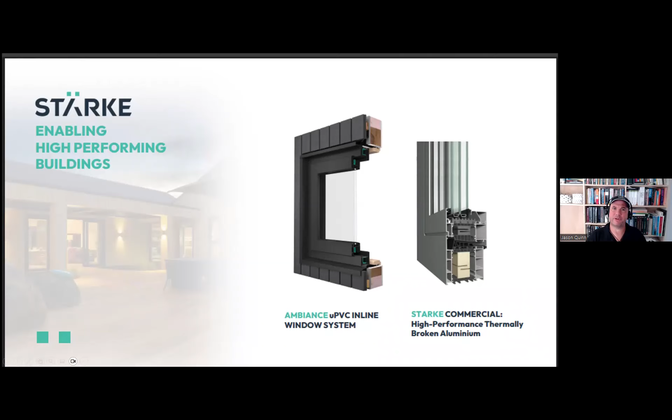It's good to show folks cross sections of the UPVC, and are you okay with the brand name? You can nod or not nod with the aluminium series. Yeah, sure, those high performance Reynaers aluminium profiles.

Folks might not know, but I've got a couple cross sections of windows in my basement I've had since 2010 or so, and I've brought them out at various times. One is basically equivalent to the UPVC profile that you offer, as well as a high performance Reynaers assembly. I've had that for a very long time. It was gifted to me by a window supplier in the US.

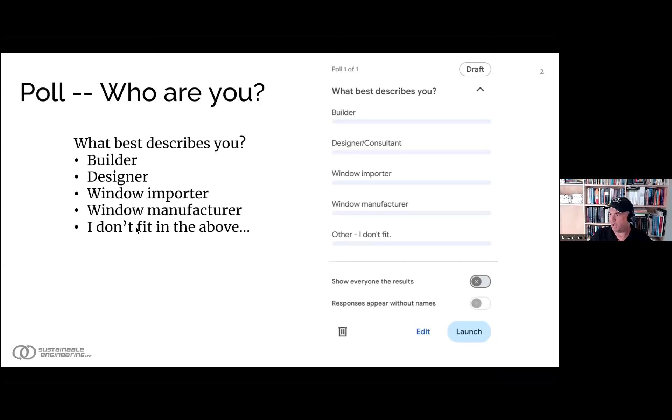This presentation is effectively a simplified excerpt from our Passive House in Practice course, which is intended to follow on from the Certified Passive House Designer training. It's basically a mentored approach where we take folks through their first passive house project all the way through certification submission.

So we've got it, and it's what we do with our own staff when we've got a new person join the team who wants to become a Passive House designer. We have a process they run through. The building science taught in the Certified Passive House Designer course is amazing, and there's not much I can think to change on that. But the processes and tools you use in actually getting your first project can be quite stressful and dramatic. I know my first project in 2012 was pretty stressful for me. So that's intended to address that, and this presentation is effectively a cut-down version of the Windows session of that course.

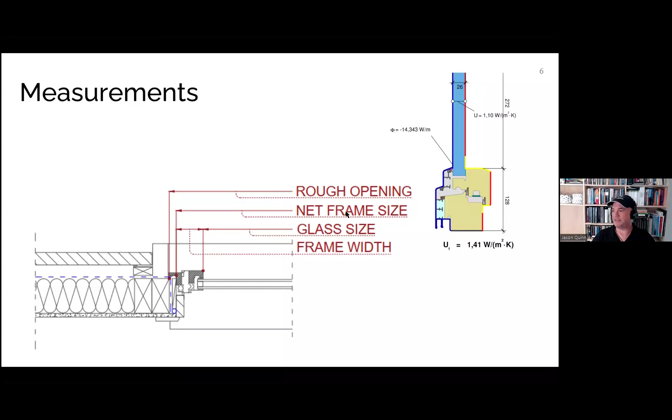There are other sizes, of course, and we'll talk about how those affect performance and get into all those details. But literally the first pitfall you run into as a Passive House designer is figuring out what size the windows actually are, which is pretty entertaining, but we just need to be clear. It doesn't help that the Germans keep using rough opening in the Passive House Planning Package manual, which confuses everyone, but it's net frame size. It's very clear. Okay, first pitfall accomplished.

The next one is - I don't know how much folks have played around with Passive House Planning Package 10. Some of the Passive House designers have been around since version 9, or I started with version 7 even. Passive House Planning Package has this new multi-pane update in Passive House Planning Package 10.

Effectively it allows you to enter windows with this window here showing in height and width on top as one window. That makes the thermal comfort calculation more accurate because it knows the whole size of the window. That allowed them to take away some of the exemptions for really small windows, but it also makes it much more accurate for thermal comfort calculations.

However, if you're using designPH, which is a process we teach internally and I recommend folks use externally, it can't handle multi-pane windows. So you have to make the choice: either, and this is the pitfall, model the whole big window as one big window and get the shading factor, then manually add in the other panes - basically adding in these mullions and transoms. Transoms are horizontal like a letter T. Transoms and mullions, right? This makes the results more accurate - it just works better if you can do that.

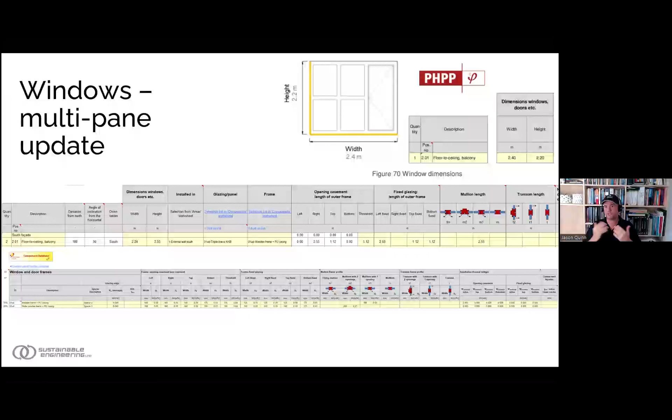Or, which we often do in our designs, is use Passive House Planning Package 9 style, where each bit of glass is modeled as a separate window. So this would be 5 windows, not 1, right? If you're using PHPP 10 style, you need PHPP 10 style data, meaning data on the mullions and transoms, so you need to simulate it conservatively in your design. Not all window suppliers have that. Starke windows do, of course, and they're available in the database, so you can just drop them in, and I'll show you that in a few minutes.

Another pitfall that gets people, and is actually reasonably important for overheating analysis, is window frames suck, right? They tend to have the worst U value - the lowest R value in the whole building is the window frames. Occasionally you'll have double pane glass in a really good performing frame, and that won't be the case, but almost always the frames are the worst part of the building.

So one of the improvements in Passive House Planning Package 10 is basically accounting for window frame color. If it's white, I put in 0.25 personally, but it's somewhere between 0.25 and 0.4. If it's black, like the series you can get from our sponsor today, then it's in the 0.8 to 0.9 range. What you'll find is that if you have a poor performing frame, especially like a solid aluminum frame, and you put in a black frame on an existing building, you'll get much more overheating because the energy is coming right in. And like everything in PHPP, this is not the reality - if you're sitting right next to that window, the impact can be much different, because this is averaged over the whole building.

So those are the big impacts that happen in PHPP before you even get to the window supply and window data. All right, Aaron, did you want to say something?

I've got the poll results if you want to know. Yeah, if I could hear them. So on the webinar today, we have builders at 5%, designers at 76%, window importers at 5%, window manufacturers at 2%, and people that don't fit into those categories make up 12%. I really wonder who the other is - is that just some people who didn't click the thing, or do you think people actually clicked other? I'll have to think about that next time. Anyways, but that's sort of what I expected.

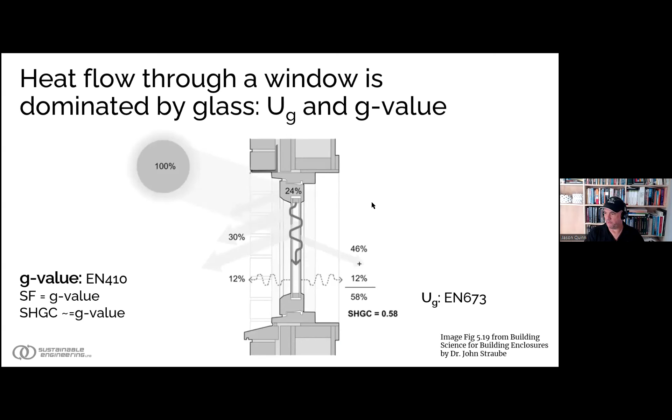All right, so the number one pitfall for passive house designers is data for the passive house planning package. You would think if you're dealing with a person that's supplying windows to you, that they would have frame data, especially if they're making millions of windows a year. That is not necessarily true.

We've got two projects in the books right now, and both are hanging out for frame data. In other words, they've bought the windows, put them in the building, passed their blower door test, and they'd like to certify their building. And we're like, hey, we told you at pre-construction you need this frame data, and it's really important, and you didn't give it to us, so we'd like to see it now.

And they're like, the window supplier told us to go pound sand. Yeah, as you can see, it was a pretty emotional one.

It's not fun being the certifier and having to say, hey, you really need to get that data, or use this conservative number. And the conservative number, of course, causes problems with their energy model, so they don't want to use that. So that is the number one pitfall.

It's a problem that stems from the designer, in my opinion, because you're the adult in the program, not the window supplier. They're kind of salespeople, to some extent, and they get to drink and party and have fun, while we do math and drawings and design buildings for our clients. So it's our responsibility to make sure the data is there before you give them money, in my opinion.

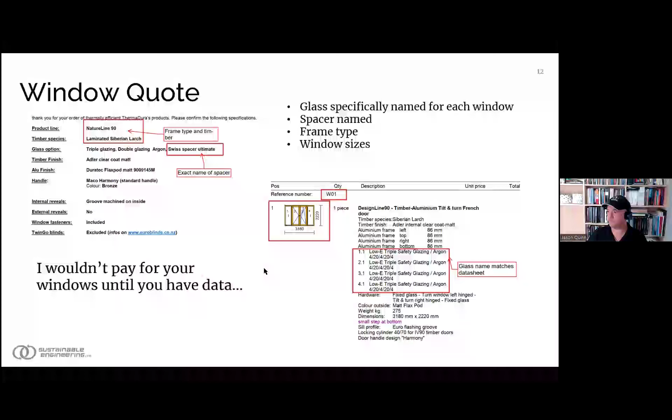There's only two variables in the passive house planning package: this UG value and this G value, or solar factor. The problem with that is it's nice because it gives you two numbers you can calculate easily and they're easy to supply, but it doesn't give you all the information you'd typically want if you want to look at thermal comfort. In the summertime, if sunlight's directly hitting the glass, the interior pane's temperature depends on where the coating is, and how hot that glass gets. I'll explain that in a sec, so we'll talk about that summer temperature.

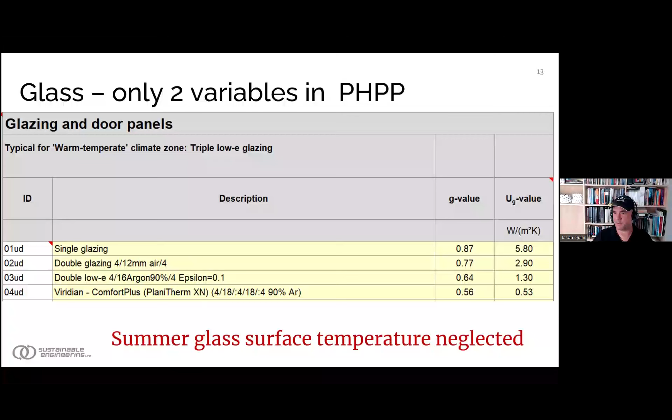So here's one European style data sheet, and it has two numbers on it that matter: the G value, which is per EN 410, and UG, which is per EN 673. In New Zealand, we're lucky because H1 literally says, tell me the UG value to EN 673.

It doesn't say where you get the G value or solar factor from, but it's close enough so it doesn't really matter in the end. And it's important that if you get these sheets, the standard in Europe says to only show the UG value to 1 decimal place, and that makes sense for double glazing.

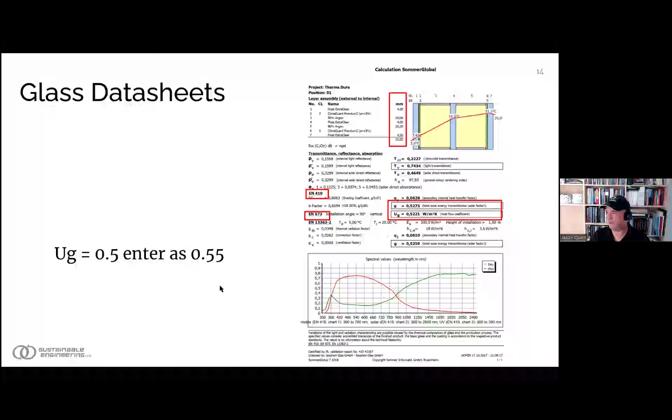That's 10% more heat loss over a fairly large area because it's all the glass area, right? So it's important, if you're using triple glazing, to have the glass at 2 decimal places, and make sure you're conservative, because that can catch people out.

Here's what I started talking about: solar heat on the window itself. PHPP just has a number for the G value, which is how much sunlight that hits the glass gets kept inside the building, but it doesn't tell you how it feels sitting next to the window.

The reason being is that's where most of the work is done bouncing the sunlight back out. So that coating gets hot, which makes the pane of glass on the outside get hot. The nice thing about having it on the outside pane is then it ventilates away, because that outside pane is next to outside air.

But if you have it on the inside face instead, you get about 30% more heat gain in double glazing, less in triple. And the inside pane - that's showing up in the G value, but what's not showing up is that the inside pane is considerably warmer now and can get quite hot. When you're sitting next to it, the heat that comes off is just uncomfortable to sit next to.

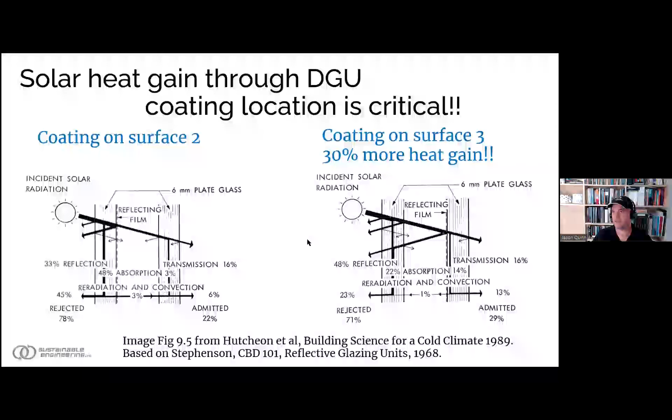So just realize that thermal comfort is one of the things we want to talk about, and where the coating is matters. Although the G value tells you how much energy is kept in the house overall, it doesn't tell you about the losses. So that's all I want to do, right?

It's often useful to plot the data when you're trying to pick glass. Luckily, most suppliers will only give you a couple of glasses initially, and you'll have to dig to get more. But realize that you can get glass that ranges over quite a range of solar heat gain coefficient, or solar factor, on this chart, which is G value. So you can get glass with the same U value but quite a bit different solar factor.

The extremes here, Xcel and Xtreme, are the two most common glasses that we use in New Zealand.

Sorry about the hand signs to the mailman outside. He really wants to deliver a package, and I'm not leaving.

So these glasses have a fairly similar U value, but they've got very different solar heat gain coefficients, and they've also got fairly similar color neutrality, let's call it that. You can see they let slightly different amounts of energy through in terms of natural light, but the natural light you can see is nearly the same, right? So there's not much tint.

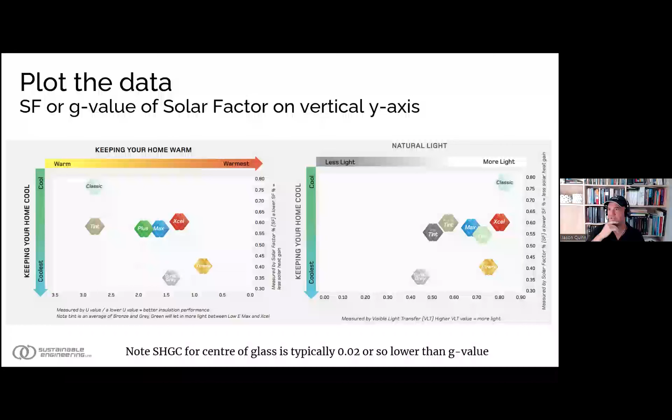So realize that you can get much lower solar heat gain coefficients, or solar factors, or G values, and still have the same U value or slightly better U value and similar sunlight gains - in other words, similar daylighting in your home. That's done through what they call a double silver or triple silver low E coating on those windows. It's a more expensive manufacturing process, but more importantly, from a pricing point of view, it's an up-spec, so they charge more for it. So just realize it's not free.

One reason I talk about solar G value is that what you've experienced living in New Zealand is not necessarily true about high performance windows. You may be used to the idea that closing a white curtain or blind on the inside significantly reduces overheating in that room. I've got white blinds closed in this room with single glazing, which bounces most of the heat out and keeps the room comfortable. So if you have white interior roller blinds with single pane clear glass, you can get a 70% reduction in heat gain by closing them.

That same room with triple low-E glass, like you'd put in a passive house in Wellington and south, you only get a 40% reduction. In other words, they're half as effective as interior white blinds. So what you're used to thinking you can do with interior blinds in that space isn't true, which is why in Passive House we push exterior blinds so much.

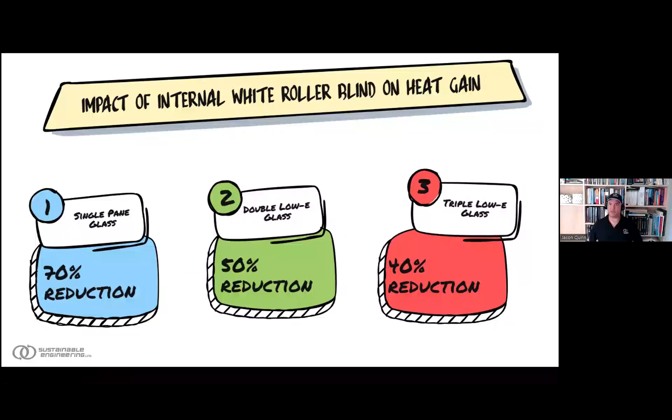I don't want to spend too much time on glass selection, but this is for double glazing. You can see the cost for glass basically doubles or even triples for some of the more expensive coatings. This is glass assembled, provided by Metro. For glass only, it can be as much as three times the price for really high performance glass. But in a frame - I don't know what frame this is - going from double clear air-filled, relatively poor performance glass to really high performance double glazing, the cost increases only about 30%. So it's not zero, but realize it's not three times the cost.

Notice also that Xcel here, which gives almost the same U value as Xtreme, is only about 10% more in this graph, whereas Xtreme is like 30% more. That's due to what's charged for the glass - you can see it in the glass prices as well. So we generally try to design our buildings around something with similar properties to Xcel, and there are a couple of vendors available locally we can work with, even in triple glazing. We only tend to use the lower solar heat gain coefficient, or G value, of the Xtreme when we need to - generally because the building's overglazed, but I won't get into that since that's not my pitfall to catch.

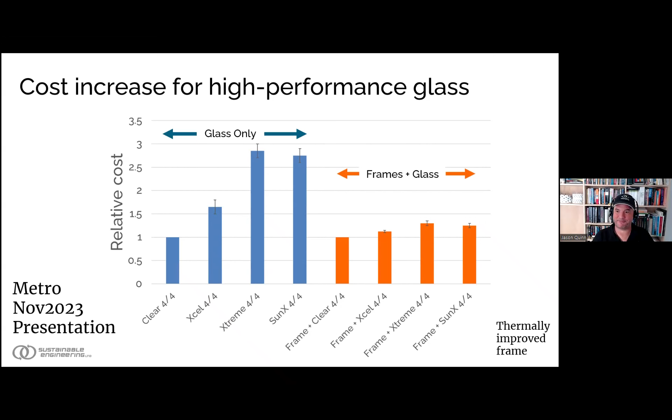Okay, next pitfall: understanding what you have or don't have. And we're just about on schedule, so that's great.

One of the pitfalls is: if you've got windows in the database in your PHPP, you need to understand what you actually have to install on your building - in other words, what's going to show up on site. It's amazing how many times I've been on a project and we look at the windows and realize we don't actually know what profile this window frame is in this location. That can be impactful - for example, if I was importing lift-slide windows but had all the data for a tilt-turn window, which is quite common, I might not know the data for that lift-slide window. I know the frame heights from the CAD drawing, but not the actual frame performance. We can estimate it and agree with the certifier, which we've done on our design projects, but if there's another frame profile we hadn't thought about and hadn't agreed with the certifier, it can cause significant grief.

The databases typically only have tilt-turn windows in them. So if you see a Passive House project claiming 'we've got a Passive House certified window,' often that only means the tilt-turn window has been calculated and certified - it's very unusual for them to have the whole suite of data. I'll show you what that looks like in a little bit. Okay, so - window performance.

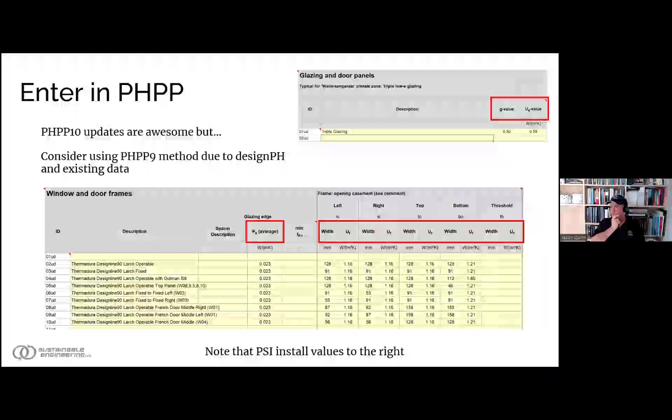So, okay, make sure that psi-g gets entered. The glass data goes into a sheet that looks like the top right, where you've got a G value and a UG for the glass. And then for the glass spacer, it goes on the component sheet, and then under the windows and door frames, there's a glazing edge section. We can put the spacer brand and model, which I don't know why I didn't put it in here. And then there's the psi-g value.

And you can see here, I think that's a Swiss Spacer Ultimate, which I should have brought a sample out, but I won't go grab it out of the closet at this point, which has a value of 0.023, which is quite high performance for that spacer. And that's a function of the spacer as well as the frame, as well as the fact it's triple glazing.

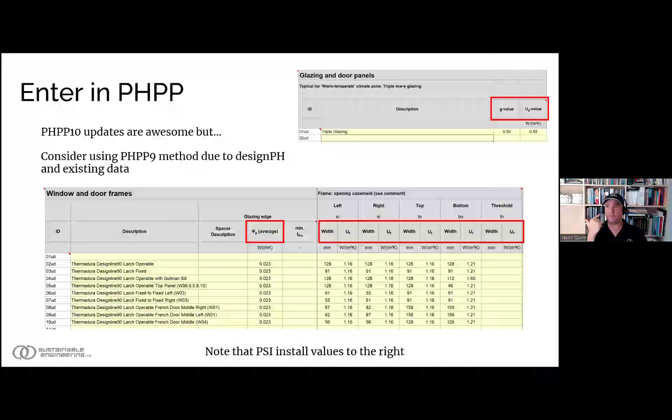All right, okay, so next one. So next we'll talk about frames, finally. It's really important you understand what you have or don't have in the building. If you don't know what kind of frames you've got in the building, then you can't energy model it because you don't know what it is.

So some windows have a full suite of data, like this is a PassivHaus planning certification for a window, and it's actually got the UF, the frame values for all these different kinds of frames, the mullions, the door thresholds, all that kind of stuff. That's really, really unusual. There's probably 5 frames in the whole database that have this much data.

Almost all of them, well, quite a few of them are just for the tilt turn window. And the numbers off this sheet that are most important to look at are the frame height and the UF value. So basically, if you think about the energy loss around the frame, it's a function of the height of the frame and the UF value.

So the UF is almost always worse than the glass. For a good PassivHaus window, this number is somewhere around 1, which is quite a good frame, right? But quite good triple glazing will be below 0.6, might be even 0.5 something. So it's losing 40% more energy per unit of frame height or width. So it's important to understand both the frame height and width and the U value.

And yeah, there's lots of ways to make assumptions and stuff like that, and I won't get to that today because that's quite time consuming. On this database, you can find windows, skylights, and glazing edge bonds, what we call spacers.

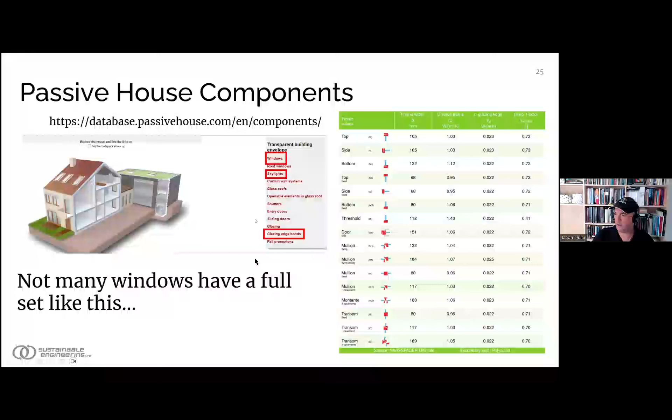This is such an annoying piece of crap to deal with that we put together a window database. So on our website, you can go to library, window data PHPP, and it brings up an article which has a URL you can link to get this spreadsheet, which is just a Google sheet with all the data in it. And this is the windows from whenever I made this slide.

So you can see the Starke windows here. They've got both fixed, awning, tilt turns, sliding, hinges, all that kind of stuff. They've got pretty much a complete suite modeled, and the data is on there. And you can literally cut and paste this into PHPP 9 or PHPP 10, which is what you should be using now.

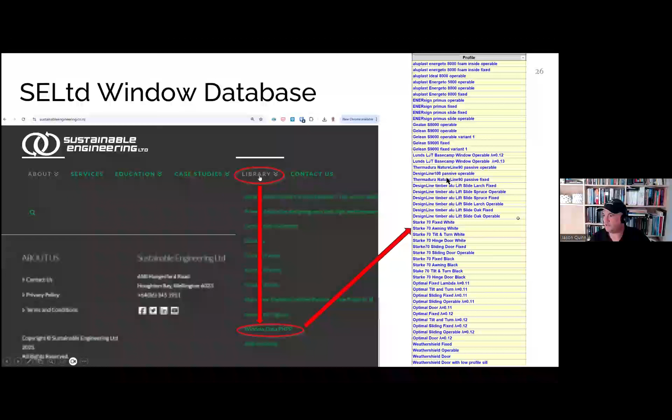Realize if you're using a funky profile, even maybe from Starke, you may have to get additional calculations done and put the data in yourself. If you're using another supplier that's not in this database, you'll have to find the data and put it in yourself. And just be careful that you've got the frames that you're using modeled correctly.

You'll get UF reports from suppliers, and they're all done to this European standard, ISO 10077-2, which is actually the same standard we use in New Zealand for our windows. I love when things line up because I'm an engineer and it's all about that lining up precision.

So this report, which we did ages ago for Thermadura, actually looking at their lift slide doors. Because they'd certified their tilt turn windows, but not the lift slides, in order to save some money. So they asked us to go off and do the calculations for their lift slide doors at that point.

Make sure you've got UF reports from your suppliers if it's not in the database you can use. And because generating the data for this lift slide door, I think we charged - it was a while back, so we probably charged more than we would now, but it'll be several thousand dollars to do that data analysis because you've got to analyze each frame and then put it together and check it.

And if you've ordered windows in and all you've got is cross sections and no data, then you should expect to pay that fee to get that frame data, or use a conservative value that might be 20-30% higher than reality to make sure that you've captured those window frames in a conservative fashion.

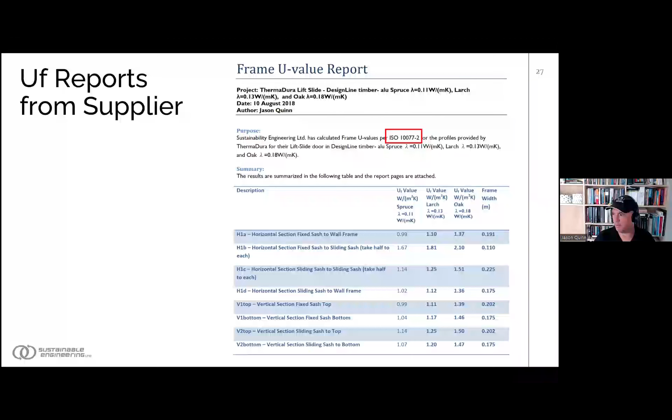One thing that often throws off buildings is that if they've only done a tilt turn window, they've often not calculated a mullion. In PHPP 10, you put mullions in separately. Or if you're using PHPP 9 style, you basically split the mullion and make it a fixed window - operable next to fixed and fixed next to operable - to split this frame width across two windows. And to do that, you need to know what this frame performance is.

For a timber window, that's pretty easy to conservatively estimate a number. For a more complex UPVC window, it often requires a calculation because there can be quite a bit of stuff in here that leaks heat effectively.

What I was trying to teach here to folks going through our mentoring class was just that you can split windows. In other words, if you have a mullion here and you have a UF, you can put it in as two separate windows and just split the width of this mullion across each frame. So the mullion width here, instead of being 143 millimeters, is 71.5 here and 71.5 here. That's one way to do it.

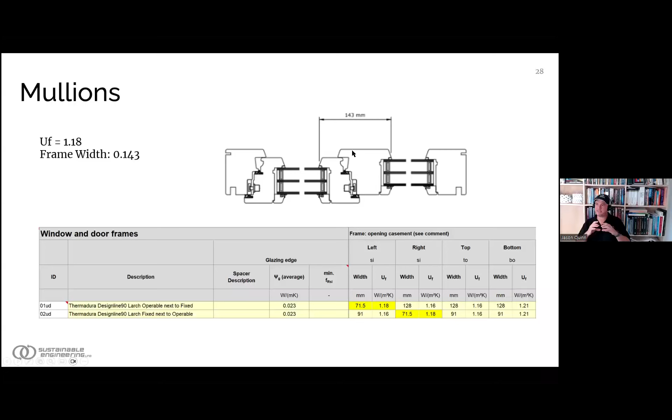And it means that you're not overcounting frame area. Now, we have accepted in the past, and we probably still will, for buildings that are heating limited - in other words, they're fine for cooling, not worried about overheating, just worried about hitting the heating demand or heating load target - if you don't put the mullion in, if you just put the full frame width in, treating it like a fixed window next to a tilt turn window, then you overestimate this mullion width. Because the frame's worse than the glass, that means you've basically made a conservative assumption.

It's not right, but it's close enough in general. Where it's not close enough is if you're worried about overheating, or if you're in a really hot climate and worried about cooling loads or cooling demand. In general, in New Zealand that's not a concern, so we tend to accept this, although it's not correct. If you have the data entered as PHPP style and you've got a Windows system with the data in the right format, it just drops in and you don't have to worry about this, but just be aware of that.

All right, another pitfall: FRSI, one of my favorite subjects. I won't get into it too much because I don't want to take the whole day talking about FRSI as much as I'd love to. But...

When we talk about FRSI, we're talking about surface temperatures. FRSI is a ratio between the interior temperature of the surface and the outside ambient conditions, relative to the air temperature inside the house versus outside. So if you think about a home where it's 20 degrees inside and 0 degrees outside, and the FRSI is 0.5, that means the surface of whatever you're talking about is 10 degrees centigrade. Because 20 minus 10 is 10, 10 over 20 is 0.5, since outside is 0 and inside is 20, so 20 minus 0 is 20.

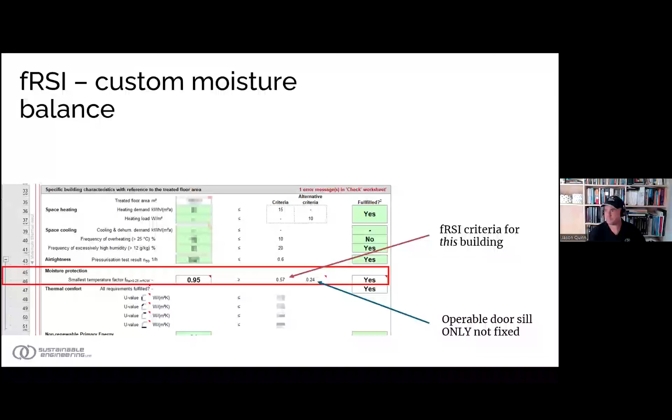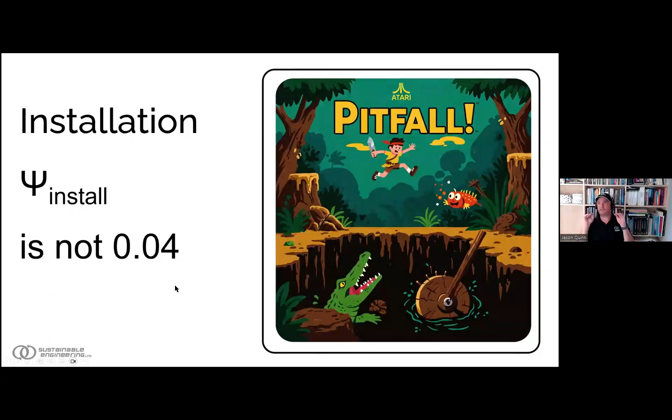All right, installation values. We'll now go on to installation side values, and we're on the home stretch here. If you use Passive House Planning Package, you'll notice we'll often have a 0.04 for psi install, and that number is reasonable if the windows are installed reasonably well. But it is not 0.04 - in other words, that's not the right answer. It's usually close enough to get you started, and you should look at some reference ones.

So this is from the PHINZ High Performance Construction Details book, which has a window install value for a window in the center of a wall with a single timber sill, and it gives you the psi value over here that you can use. It's 0.04, right?

However, that's not true for all window installs, especially for heads - if you've not accounted for that lintel above the window in your timber wall fraction, which is relatively common in Passive House projects, then you need to think about that psi value for that window head, which can be 0.06, for example. And door sills can be quite different. There's quite a few values in there.

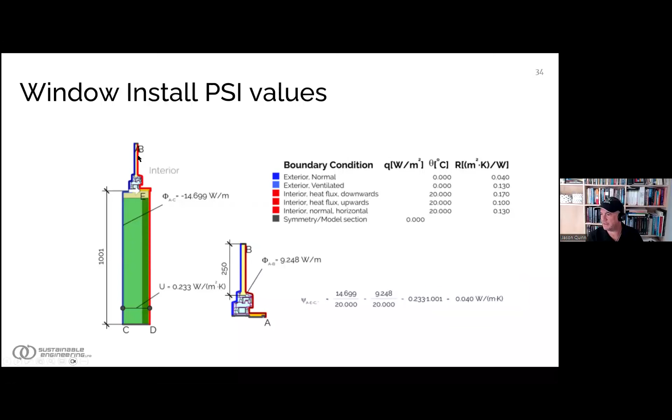Also in the same thing, when you're talking about install psi values - the additional heat loss from installing the window in the wall, the way the builder builds it and puts it in - at that same calculation, generally they can give you an FRSI for the install. And that FRSI needs to be met by that same criteria in that front sheet we just looked at in order to certify the building.

What's going on is they're trying to prevent surface mold completely from the building, right? Unlike half of new buildings being built in New Zealand - I think that's the latest BRANZ data or something like that - having mold in them, or half of all buildings surveyed, which included quite a few new buildings, I guess is probably the right way to say it as an engineer. So be aware of FRSI calculations.

You don't need to do a thermal bridge calculation for all your junctions. Actually, I think a good Passive House design has zero thermal bridge calculations because they've just looked at a database, looked at a handbook, done good practice constructions, and they don't need to worry about FRSI because all their junctions are good quality, right? So they can spend the money they would have spent on thermal bridge calculations and spend it on the building instead.

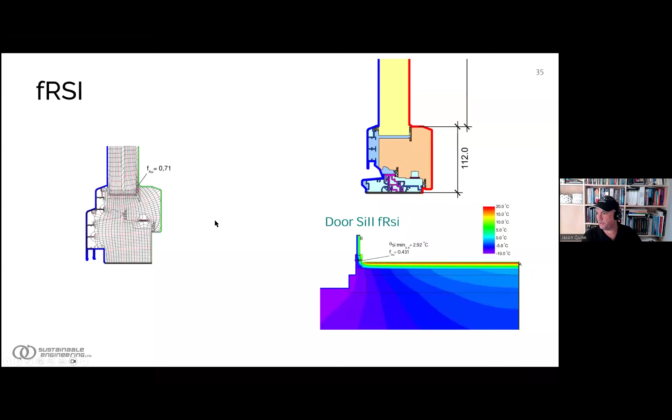And there are several people throughout the country that can do thermal bridge calculations, including us. One of the first places to look is the PHINZ handbook, and there are quite a few junctions in there, and they're all New Zealand centric. Do note that there's some poor quality junctions in there - I'm supposed to not swear.

So there are some junctions in there that are just for reference, like a solid aluminum sill installed, or a door sill on the edge of a concrete slab. Those are there for reference so you know what normal business-as-usual might look like. So not every junction in there is a high performance one, but there is a whole suite of high performance junctions for uPVC, timber, thermally broken aluminium - a whole suite with the window in various positions in a wall, so you can see the benefit you can get.

And a super secret hint: just pulling the window back so the front of the window frame is even with the outside of the timber studs gets you most of the benefit of sliding the window back in the wall.

You don't have to put it in the center.

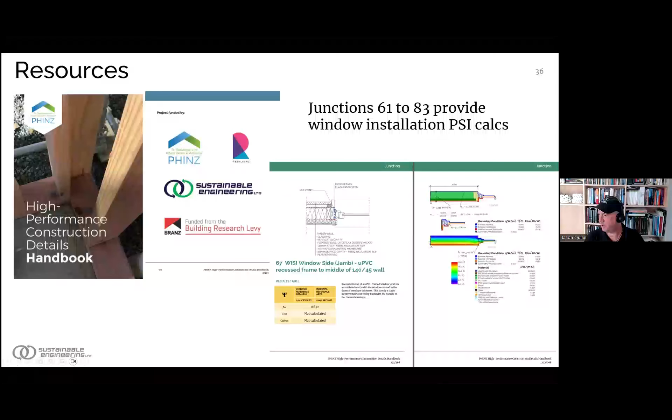There's another series of databases available for you to use, some of which are really cool and moderately useful, unfortunately, because they're not constructions we use in New Zealand very much. But there are some timber ones as well.

There are three available downloads on Passipedia. You need to be a PHINZ member, which makes you pretty much automatically a member of IPHA, giving you access to this database. There are three different things in here, one of which is a PDF download of a thermal bridge catalog.

The cool thing is they've got windows installed in walls with external insulation, which is not always useful, but there's some good stuff. They've got those windows parametrically modeled with curves so you can see where they land. The big change in the curve is because the window basically pushes into the insulation layer like you'd want. Then there's this other thing called the thermal bridge tool, which is a spreadsheet tool.

It's an executable, unfortunately, that launches an interface that looks like Excel. Not sure why. Anyway, you can go in and edit the yellow cells, just like in Passive House Planning Package, and get a thermal bridge value for sliding windows around in different kinds of walls.

Unfortunately it's European constructions again. But if you're doing a retrofit of a concrete building with external insulation, this thing's a bomb.

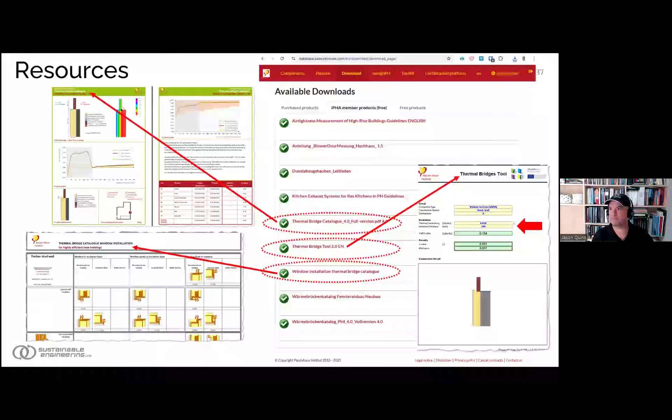And then finally, there's a window installation thermal bridge catalog, which does include timber walls. I encourage you, if you're doing Passive House Planning Package design, to get your data and install values from these resources. You need to log into IPHA to get access to it.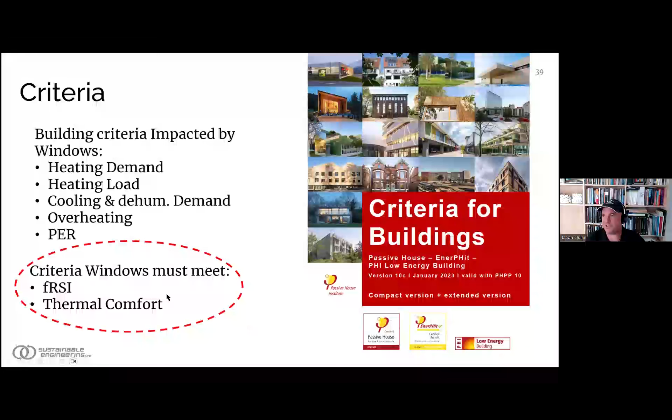Finally, and perhaps most importantly, a pitfall is comfort. We're down to the last couple slides. Comfort is actually a certification criteria - you need to meet it. The way that's done in PHPP is by looking at FRSI and thermal comfort calculations.

One thing I want to point out, because it's a pitfall, is that there's no longer an exemption for windows smaller than 1 square meter for thermal comfort if you're doing a certified passive house. PHPP 10 can handle windows in assemblies, so you need to meet that criteria.

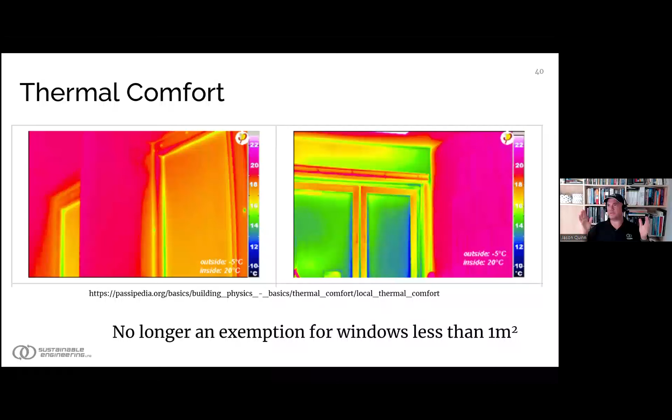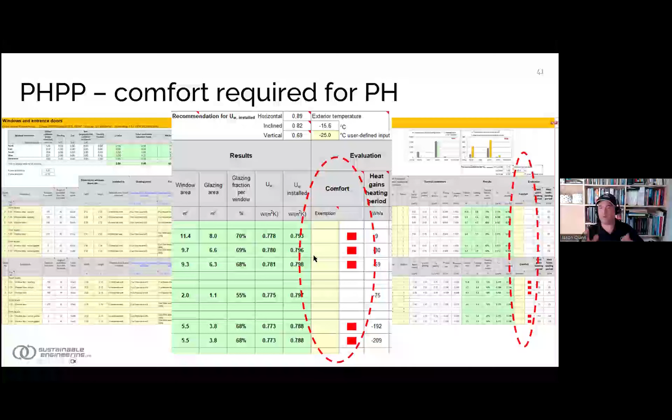So if your PHPP has these red squares in it, that's not a good thing - you should not be comfortable at that point. You should be asking the certifier for help, or figuring out how to put in better windows. There are lots of solutions, but just realize that if you get these red squares, you've got an issue.

To summarize, when you're sourcing data: you get Uf and frame heights from the window supplier or from a database somewhere. You get Ug and g-value, again from the window supplier, calculated to the standards in the middle. You get psi-glazing edge from either the PHI data sheets, or they can be calculated by the window supplier.

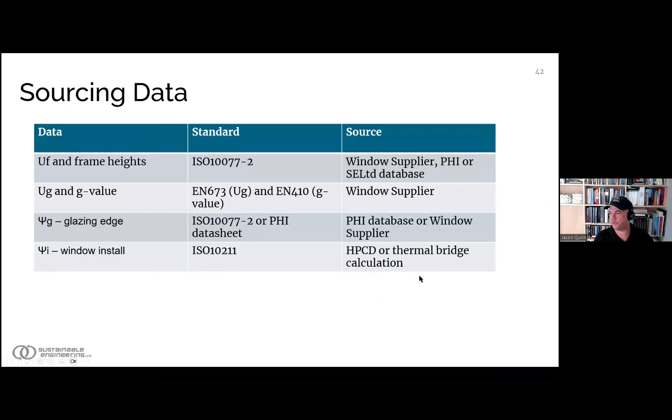And finally, you get window installs either from the high performance construction details book, from bridge calculation, or from another database.

One last pitfall as designers and builders is that clients tend to consider your time as free, especially if you're on a fixed price contract. I've had clients come back to us when we're doing initial design with 10 window quotes and want us to model all 10 in PHPP.

I really encourage you to push back on that and not do it, because it can take literally like 4 days to do that - even if the data is well formatted, even if all 10 of those window suppliers had all the data. Be really clear with your clients that that's not a reasonable request, that you've given them performance information, and then let them pick whichever ones they're likely to go with and move forward. I can understand why a client would want that, but it's really not reasonable.

And that's probably the last pitfall we'll talk about today. To summarize what to provide for certification: glass data, window data, frame data, and installs.

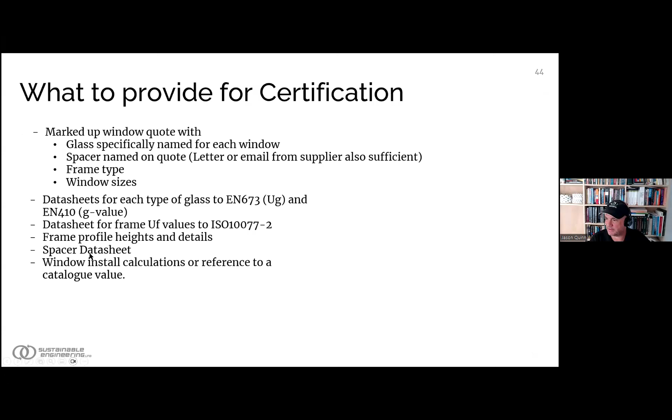Last bits of advice: make life easier on yourself. You can use windows with data available, like those in our database or PHI certified windows. UPVC windows are generally the best cost option; anything else costs more, as certified components are more expensive. They often perform well, and look good too.

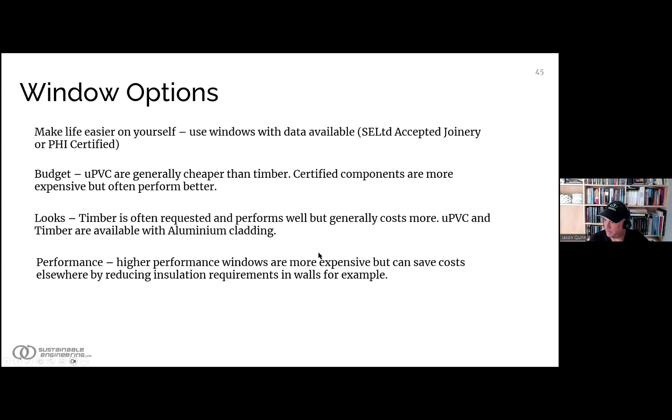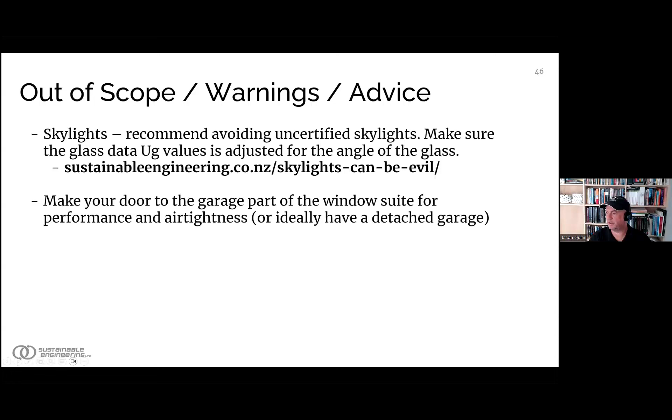We didn't get a chance to talk about skylights, but realize that glass performance in skylights is very different when you tip the window over. You can gain quite a bit of U value, or lose a lot of R value. Also, don't forget to order the door to the garage when you order your windows from your supplier, or ideally you'd have a detached garage - that's something we've seen a lot of.

All right, I guess let's go to questions.

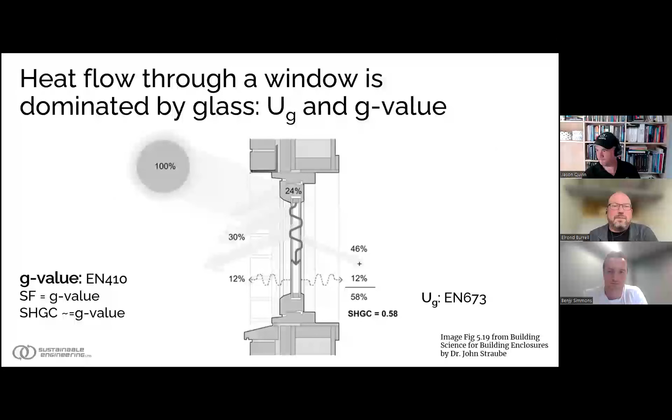Yes, sorry. I think it was the numbers put in there - I got a little bit mucked up because it says exterior absorptivity, one says 0.25 and one says 0.9. I don't know if that's an example for a white joinery on the left side and a black joinery on the right side.

One way we deal with cavity cladding on buildings - let's say you have a nice charcoal black cladding on a building, with an air gap behind it, and your passive house wall like you'd like to design. The emissivity of that wall surface is 0.9, but because it's got the ventilated cavity, on the area sheet you'll lower that value down by 0.9 again, so you get 0.81. That basically accounts for the benefit of the cladding shielding you from night sky radiation.

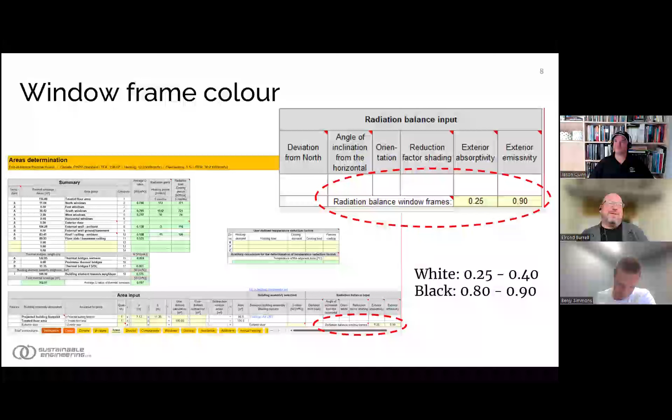Thank you for that, I didn't realize that. It'll also mean less movement in the frame if it's not heating up as much, so presumably less reinforcing needed.

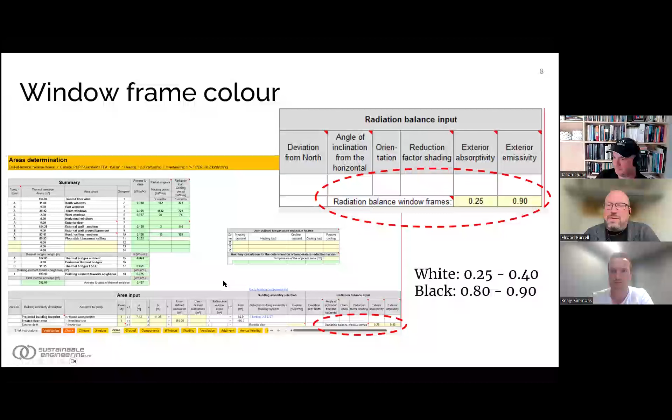In the Q&A or chat, we had a couple of comments where Mark Anderson was talking about flashing details and different frames having different slots built into them to fit the flashing into, and made some comments on that. Then Bjorn suggested a flashing company in Hamilton called Eurotech, with a link provided, and they've got a thermal performance document which Jason did for them, downloadable from their website, showing the installation psi values using that recessed flashing system. So some good resources available there.

Did you want to comment on that, Jason? I like Eurotech's flashing system, I think they won some awards for it as well. The main thing is that flashing system is very suitable for this style window, like this S8000 or something, a UPVC window with a European style interface where it's flat with ridges in it.

So that Eurotech flashing works really well for those European style windows. But the particular window I was thinking about actually had wood fiber on the outside of the frame behind a metal flashing system, behind a metal covering to keep the rain off, and the flashing system just wasn't suitable. It was a commercial building, not a passive house, just to be clear, so it's not one of the folks in our community. They had a problem with the system because the flashing wasn't provided to them by the window supplier.

So it's just a matter of, you're welcome to use Eurotech flashing in your own windows. I certainly think about that in a lot of our projects, or even other custom flashing systems, but think about it, is what I'm saying. The pitfall is just thinking you're going to order the windows and you're sorted, because they don't always come with the flashing systems, and sometimes the flashing systems aren't even thought through for New Zealand style installs. So that could be a catch. It's a bit of a shame because not every architect, they're better at external moisture than I am by far, but they're not necessarily experts in flashing system design around windows.

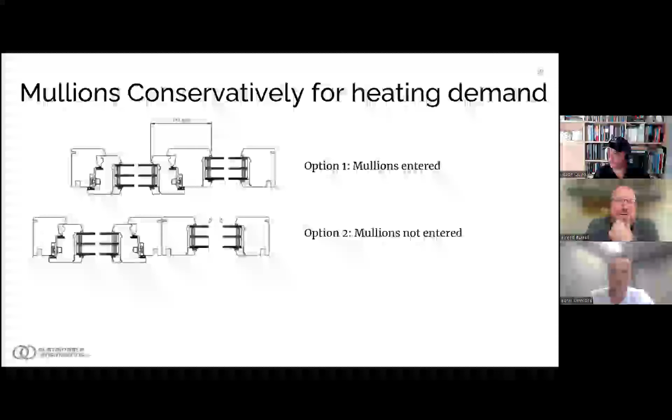Following on from that, Matteo was asking about you repeating what you said, that in terms of the installation psi value, you don't have to position the window in the center of the frame. Just putting it back enough so it's in line with the outside of the frame is enough to get a good psi value, which personally is typically the sort of details I've done, where the front face of the window aligns with the RAB or the outside of the framing rather than going particularly deeper than that unless it's been necessary for a reason.

Is that correct, what you said? That's correct. And the classic window to look at is a UPVC window.

So like if you look at Stark's osmosis, we're talking about a Stark window. The Stark UPVC window has an aluminum stiffener in the frame - I'm sorry, it has a steel extrusion in the bottom of the frame. So if you push that window out of the building, even say 20 or 30 mil, the heat leaks into that steel and gets through the frame, basically cuts the frame performance in half. So the psi value might be like 0.12.

And then you slide that window back until the front of the frame's even with the outside of the RAB, as you suggested, and all of a sudden it's 0.04. And then you slide it to the center of the wall and it's 0.038. So the additional depth of sliding it back into the center of the wall typically doesn't buy you very much.

But often I'll set the recess of the window into the frame by the flashing system we're using, because both the Eurotech and the Stark flashings have basically a fixed depth they can work with, and they're designed to work with standard cladding systems and recess it back far enough that the window's fully inside the thermal envelope. But pulling the window to the center of the wall isn't always the best position.

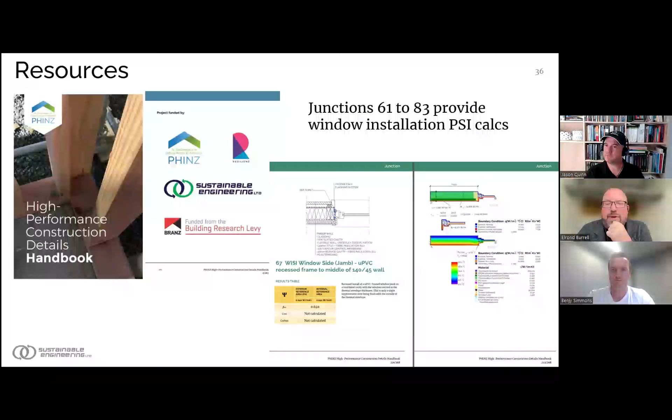Yeah, okay. Some of the questions which I made notes of during the presentation - when you're going through the different elements that make up the window performance, part of that is the frame. Have you got any kind of guidance or suggestions around when you're testing different frame options? For instance, if you get a timber window option, quite often the UF can be a bit lower, but also you end up with a wider frame.

So you're reducing the glass in your window and increasing the frame in your window. Is there any particular guidance or rules of thumb around that, or is it just go for the thinnest frame, the best performance you can get, and head in that direction?

In general, you want the thinnest frame you can. I didn't want to talk too much about frames today, but basically timber window technologies went through three generations in the Passive House community. The first generation is like a normal timber window, and they didn't have very good spacers, so they stuffed the glass way down into the frame to get the glass performance up. But the timber frame was like a normal window you'd see in a 100-year-old house in New Zealand, just with double glazing and then triple glazing.

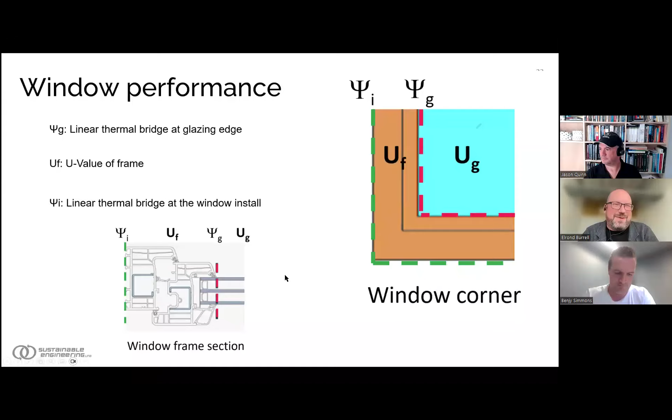And if you, I think you were there, you had it briefly, like that one.

So if a designer or someone doing energy modeling is trying to pick the right value from a sheet like this, should they worry about the particular specification of the window profile shown, or just look at the UF value and match it, even if the closest match is shown as a timber frame on this certificate?

No, you should pick the frame type first, then go across and look at the glass. Ignore the UFs here initially, they go from 0.6 to 1.17. Just pick aluminium in this case, then find the glass that's about right, whether double or triple glazing. But if you've got double glazing in a 0.6 frame, you still want to use 0.043 plus 10%. So ignore the U value under those, use the actual frame type. Frame first, then glass, then UF - that's how to get the most accurate result.

And of course, if I'm early in design, I'd always look across this and pick the worst one and add 10%, because it's usually not a huge impact on buildings in New Zealand since our U values are higher than they'd be in Europe. Early in design it's easy to put in a more conservative number and fix it up later - going the other way can really be painful in a design project. That's a good rule of thumb: use conservative values from the start wherever possible, because otherwise one of them may catch you out.

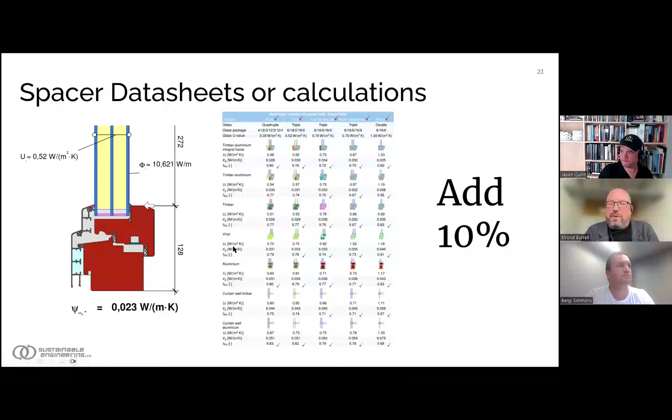So what you just touched on with FRSI - PHPP 10 gives two FRSI values for a project, not per climate zone but per individual project. From what you're showing on the windows, the FRSI on the verification page is picking up those red comfort issues on the Windows sheet, so those show up as an error if you've got them. Does that mean there are other parts of PHPP where designers need to enter FRSI values, like for every thermal bridge calculation on the area sheet, or anywhere else?

It's good practice if you've done a psi-calc and an FRSI calc to put it in the sheet, so it shows up and flags an error for you if there is one, which is handy. But we don't require FRSI calculations for thermal bridges that are obviously going to meet the criteria. Some certifiers, like some Australian certifiers, literally want a thermal bridge calc and FRSI calc for every junction in a building - they want like 20 thermal bridge calculations, but that's a waste of money in my opinion, and a waste of designers' time. It's work we could do, we'd make money at it, but I think we can all find other things to do with our time. So if you've got a timber junction, you generally don't need an FRSI calc, and I wouldn't expect you to put it in.

Okay, so people don't need to stress about calculating more FRSIs. It's only if they're entering thermal bridges on the area sheet that they should be considering including the FRSI, where it's a thermal bridge where you might be concerned about the FRSI.

Yep, and you can best determine that by just looking at the HPCD or another catalog and developing a feel for it. Should they be looking for window data? I can't remember what you showed from your spreadsheet that includes the FRSI value for the window installation as well.